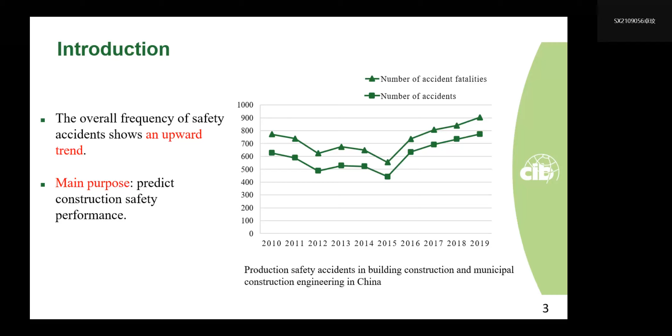Not only in China, casualties from construction accidents have been a problem that has plagued the world. So, it's urgent to predict construction safety performance. This is also the main purpose of our study. It can be found that researchers are trying to combine multiple methods to improve the accuracy of construction safety predictions. This is a valid direction for research.

However, many researchers have not focused on safety performance as a complex variable affected by multiple factors. Prediction accuracy can be improved by analyzing the variable and its influencing factors together. Meanwhile, the time series has a principle of near is greater and far is less. That is, the future trend of time series data depends more on the past data close to it.

Considering the 2 points of departure, this study used influencing factors to predict safety performance and took into account the relative importance of time series for each year.

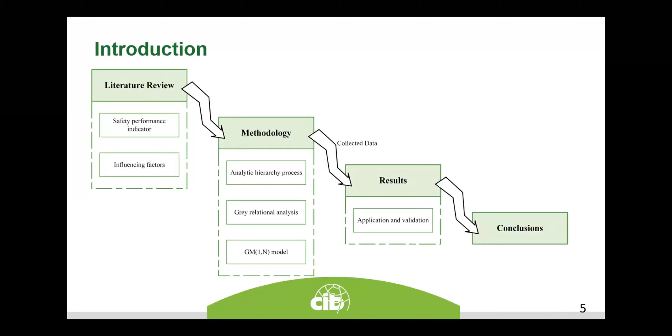The main process of this study is carried out according to the figure. Firstly, the indicator and its influencing factors were identified by the literature review. Secondly, the analytic hierarchy process, grey relational analysis, and the GM(1,N) model were used to construct the prediction model. Then, the collected data was applied to the model. Finally, conclusions were drawn.

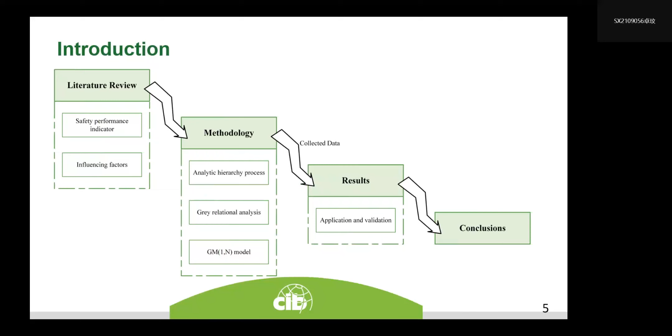Research on construction safety varies in different national contexts. Therefore, the literature collection of indicators and factors was mainly in China. It's more suitable for the Chinese construction industry.

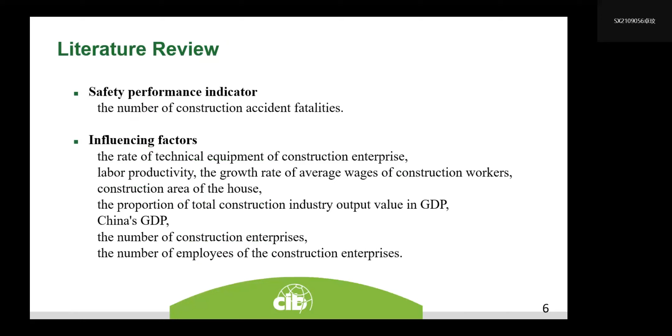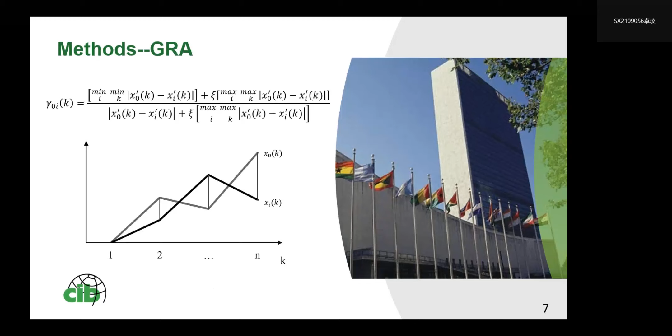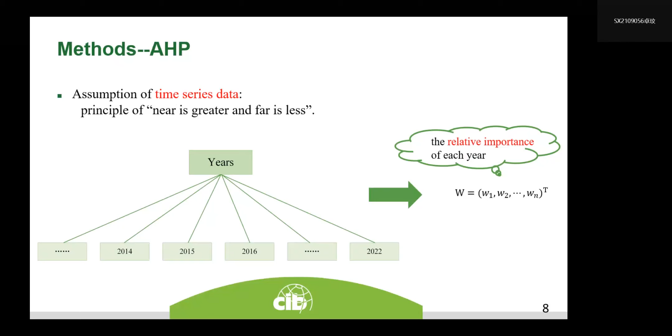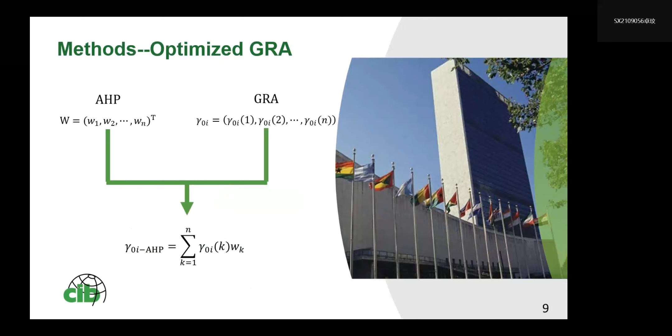The analytic hierarchy process is a method for analyzing decisions by factoring weight. Since the time series has the above-mentioned principle, in this study, AHP was used to calculate the relative importance of each year. It's worth noting that in grey relational analysis, the weights of all years are the same, which is not in line with the principle of time series. So, this study used AHP to optimize the grey relational degree.

Grey prediction theory transforms the irregular sequences into regular sequences and then predicts future data. As one of the grey models, the GM(1,N) model is composed of the system characteristic sequence and the factor sequences. It's more effective for the prediction of complex systems. So, in this study, the GM(1,N) model was used to predict construction safety performance.

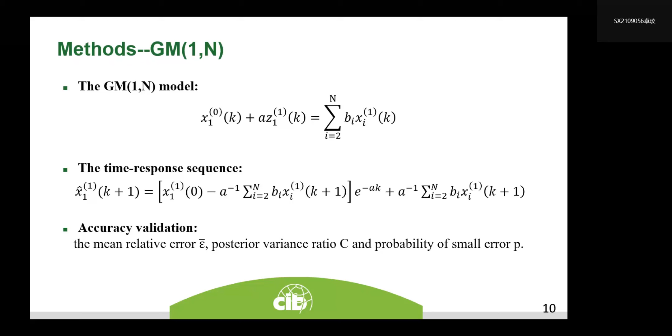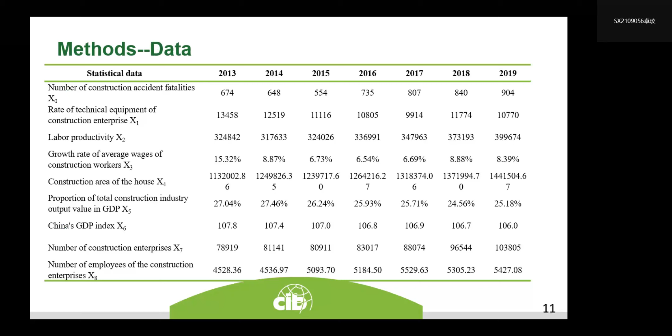Statistics were obtained from information publicly released by the Chinese government. Due to the division of responsibility mentioned previously, this study selected data from 2013 to 2019 for the application of the model. Now, we move to the part of the application.

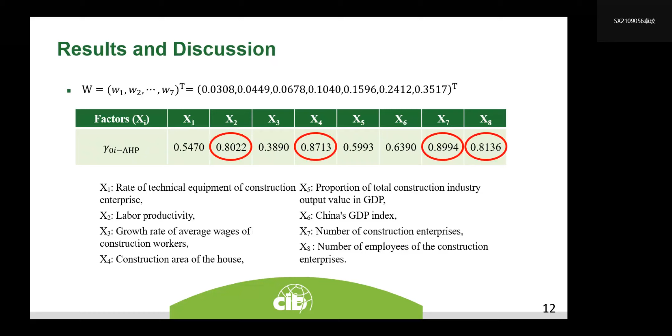After the calculation of the relative importance and the optimized grey relational degree, it can be seen that there are 4 factors with grey relational degrees greater than 0.8. So, these 4 factors were selected as the factor sequences for prediction. Then, the predicted results were calculated by the GM(1,N) model.

Due to the shortcomings in the mechanism, parameters, and structure of the grey model, the predicted results sometimes show fluctuations, resulting in the model failing to obtain accurate predicted results. Therefore, it's necessary to remedy the original model to improve the accuracy.

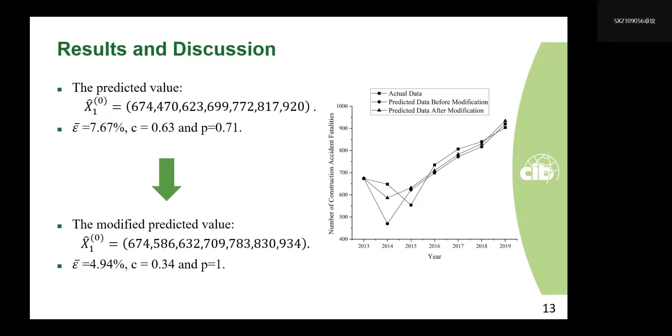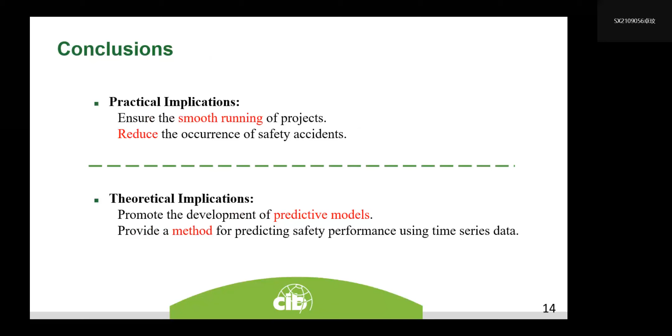This study helps to plan the necessary actions and measures to ensure the smooth running of projects. By controlling the influencing factors that are strongly related to safety performance, the occurrence of safety accidents can be reduced. At the same time, the constructed model promotes the development of predictive models. It also provides a method for predicting construction safety performance using time series data.

However, there are still some limitations. The grey model has the characteristics of small samples. It's difficult to predict large samples in a long time range. Therefore, improving the prediction effect of the model requires further research in conjunction with the characteristics of the construction industry, rather than increasing the prediction years of the data.

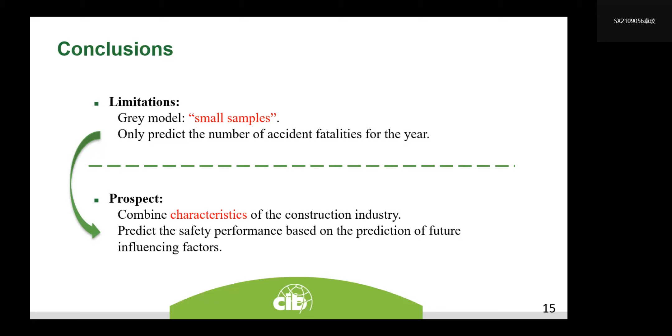At the same time, it can be found that this prediction model can only predict the number of accident fatalities for the year based on the influencing factors. In the future, we will predict the future value of the influencing factors and then predict the safety performance based on the factors. That's all for my presentation.